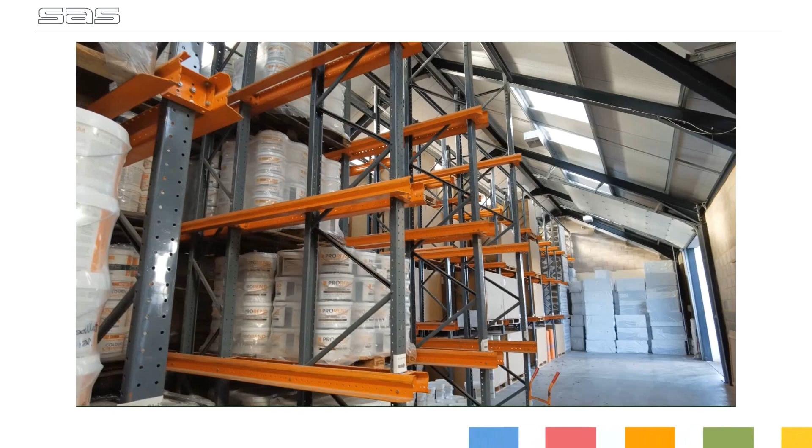SAS Europe Limited is a UK-based manufacturer and supplier of external render systems and accessories. With over 20 years supplying high-quality materials, SAS continues to innovate and create advanced systems and solutions, tailoring the latest materials to match the construction method, specifying solutions that aren't just fit for purpose, but designed for purpose.

Based in the southwest of England, SAS distribute nationwide, offering fast delivery direct to site.

SAS Europe's product range consists of ProBead UPVC render beads, ProRend Color and ProRend ThruColor Monocouche one-coat renders, ProRend Premium base coats and paints, ProRend EIFS external insulation systems, and ProWool rendered rainscreen systems.

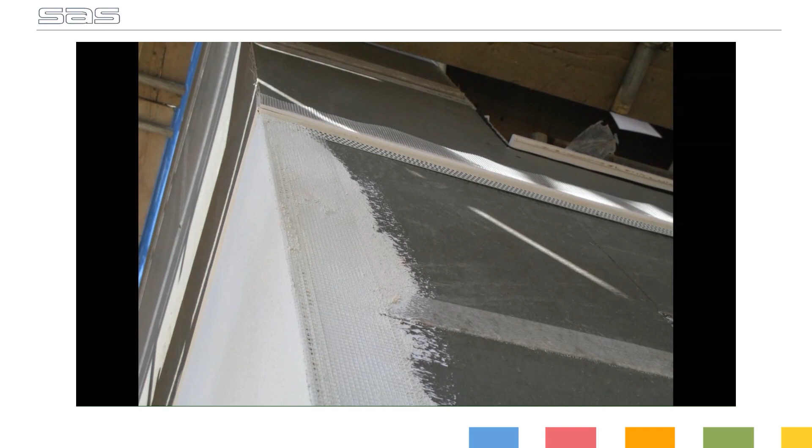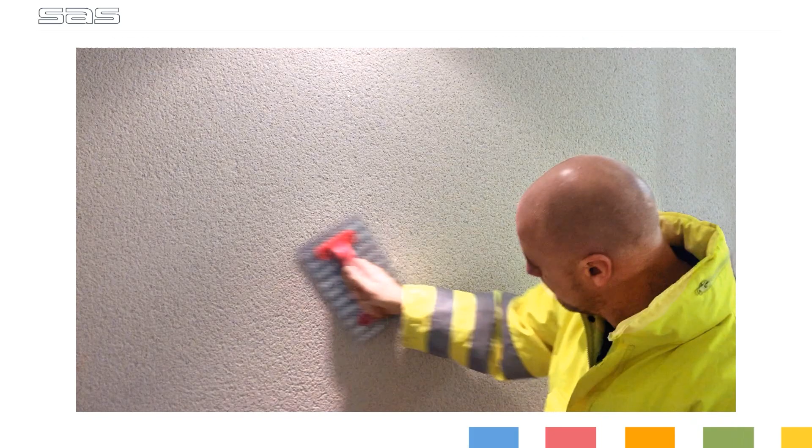There are many different render products and systems available. So firstly, we're going to run through the main types of systems and then have a look at which is most appropriate for each situation.

There's a good reason rendering is such a popular method for cladding a house, from achieving a traditional cottage look to finishing the most modern designs with clean, crisp lines. Render comes in a huge range of finishes and colours.

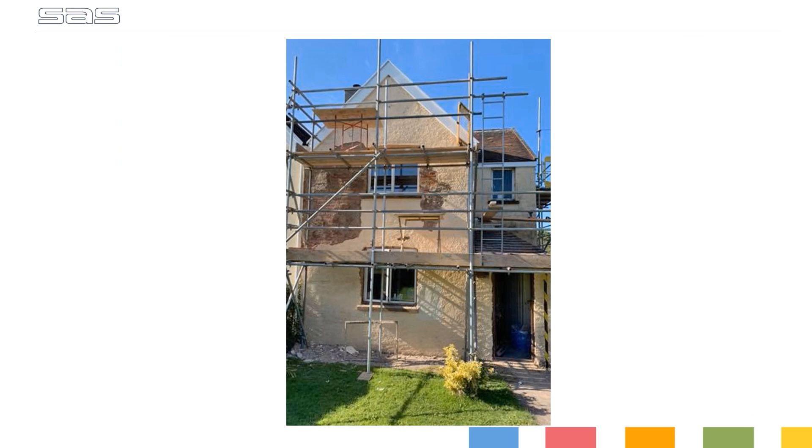Render can be used in conjunction with other forms of cladding to create attractive features and details. There are products and finishes to suit all budgets and everything can be tailored to the construction method. You can use render as part of a renovation to completely transform a dated building into something smart and modern. If you use external wall insulation, you can even transform a building while increasing the insulation value.

When you're looking at render, it's important to consider different types of products and systems to ensure you're making an informed decision when it comes to the right system to suit your needs.

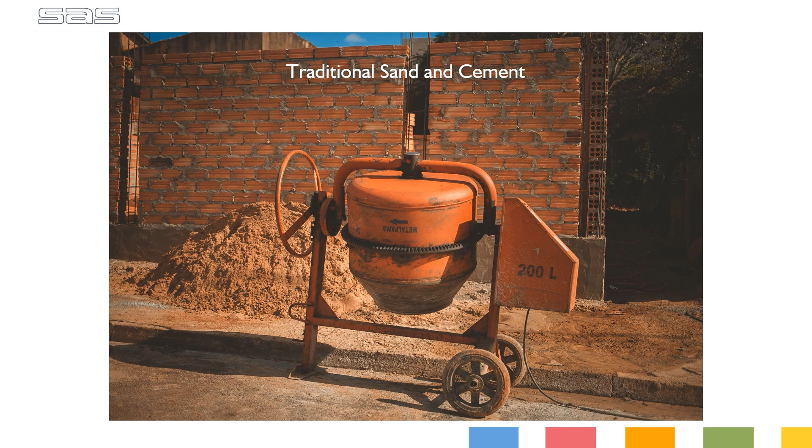If we start by having a look at traditional sand and cement render, we can have a look at the pros and cons. One of the main reasons people like to use sand and cement is because the material is very cheap. Also, because the method has been around for such a long time, a lot of general builders can render in sand and cement.

Traditional sand and cement render is normally made by mixing 4 parts of sand with 1 part cement and is applied to the substrate at a depth of about 15 to 20 millimeters.

It's this on-site mixing that throws up one of the main cons. If you're hand mixing on site, you can't guarantee the consistency in the mix, meaning some areas will be stronger than others. The application is done over the course of 2 to 3 coats, leaving the render to fully cure for a few days between coats. Once finished and fully cured, the render must be painted to finish.

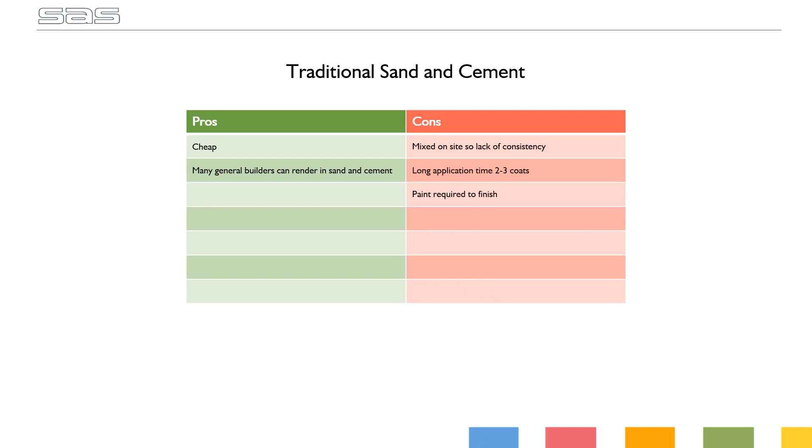While this method has stood the test of time, it's not without its drawbacks. Mixing render on site also means that you've got no manufacturer's warranty, which is one of the main reasons that housing warranty providers prefer pre-mixed products. The cement content and application thickness of sand and cement also means that it's not really suitable for any substrate that could experience movement, as this will likely lead to cracking.

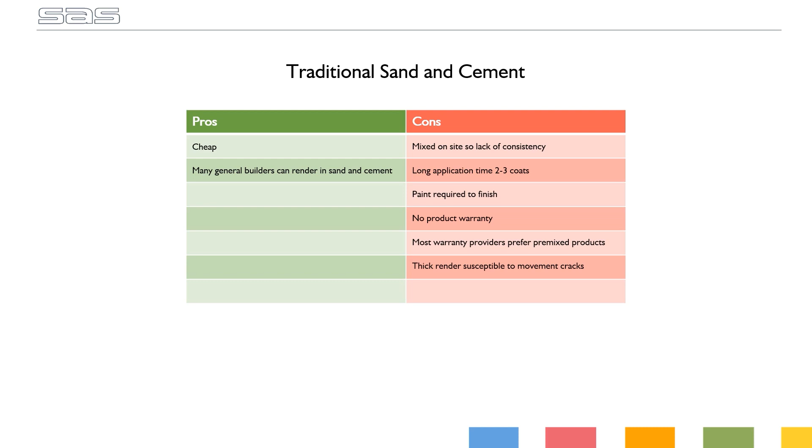So while the material itself is very cheap, due to the number of coats, drying times and paint application, the whole process takes quite a long time, which is obviously paid for in labour and scaffold time.

Let's compare this to an OCR. This is a generic term given to a one-coat render that's pre-mixed and a sand and cement alternative. These often contain polymers and bonding agents as well as additional additives to aid application.

While OCRs are generally more expensive than sand and cement, they're still a relatively low-cost solution. It's also worth noting that while it's a great alternative to sand and cement, it isn't sand and cement, so you should be using a professional with experience in this type of material.

While OCRs still need to be finished and painted like sand and cement, they do come with a number of additional benefits. The pre-bag nature of the product means that you've got complete consistency throughout the mix. This obviously makes the mixing process a lot easier, as everything you need is in the bag. This also means that the manufacturer can carefully balance waterproofer, polymers and any additional additives to create a more capable material that can generally be applied in one coat with a couple of passes, reducing the application time.

Pre-bagged material also has the added benefit of having a manufacturer's warranty. For this reason, it's the option preferred over sand and cement by most warranty providers. The polymers included in the mix can increase the capability of the render and can also create a comparatively lightweight solution. A huge advantage to any commercial project, or anywhere you need a considerable amount of render, is the ability to apply the material by machine, which again decreases the overall labour time.

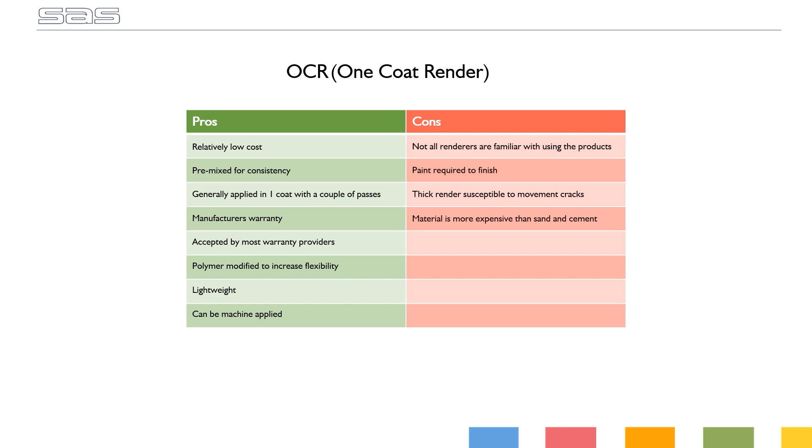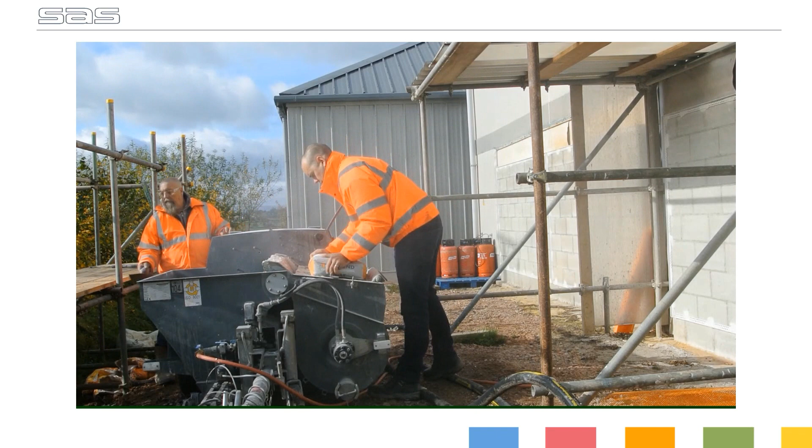At SAS, our OCR solution is ProRend Float. With its ease of hand or machine application and a smooth finish, it's a great alternative to sand and cement, offering all the benefits discussed. We also offer a range of premium paints to complete the application.

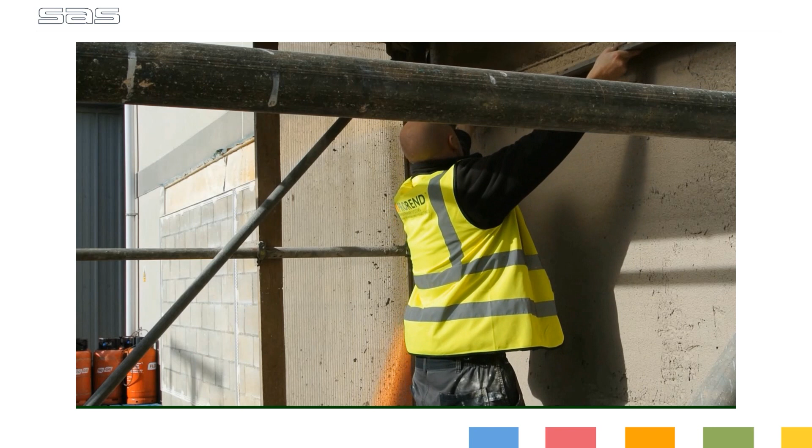Let's have a look at through-colour monocouche render. As we know, on some sites speed is key. It's for this reason that a large portion of major house builders adopted through-colour render systems, often referred to as monocouche render.

With all the benefits that we've discussed when using a pre-bagged system, this also has the added benefit of being pre-coloured, removing the need to paint. Removing the need to paint also results in reduced scaffold time, which can equate to a great saving. Available in a wide variety of colours, monocouche renders offer a great solution for new build block homes. The material should still be applied by a professional, but due to its popularity this has become a common trade.

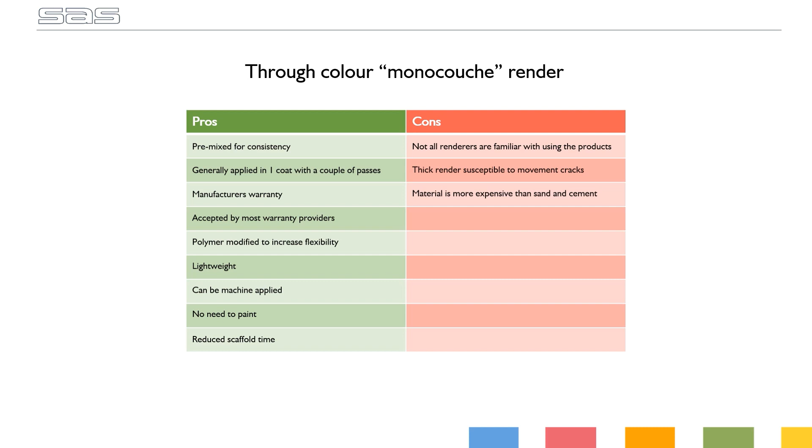At SAS we have two fantastic monocouche renders, with GoRend offering a highly competitive hand or machine applied render, giving you all the advantages that we've discussed, and ProRend Colour, our premium silicon enhanced monocouche render, giving you an additional level of water repellence.

Now let's have a look at how this compares to a thin coat system. Thin coat systems offer a high performing finish suitable for application onto a wide range of substrates. While the application is completely different to a monocouche render, it generally requires 3 coats.

A thin coat system will offer drastically increased crack resistance. The thin application combined with the lack of cement allows a thin coat to absorb a lot of movement before cracking. The added flexibility makes thin coat systems the perfect solution for both EWI and rainscreen systems, as we'll see.

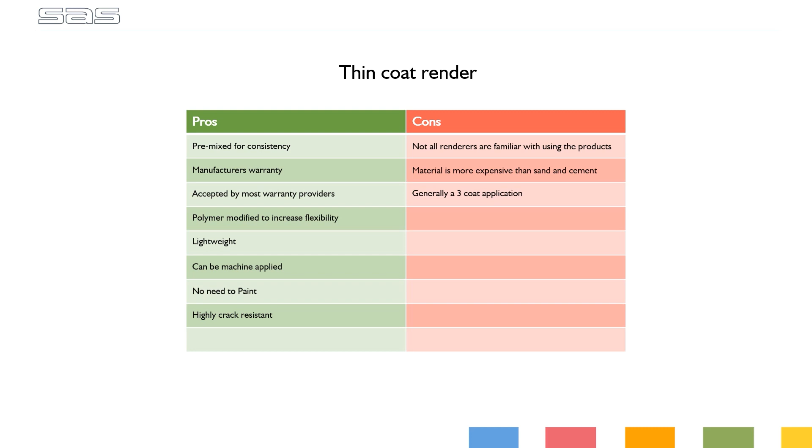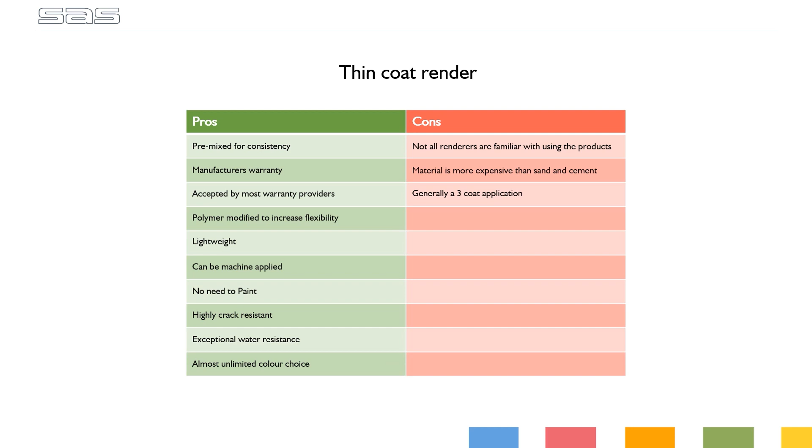Another reason you may be considering a thin coat system is a higher level of water resistance, especially when using a silicon-based top coat to provide additional protection from the elements. Due to the nature of the thin coat render, it's much easier to tint, and as such it's available in an almost unlimited colour choice.

Our thin coat option is ProRend ColorTex, a silicon-based render system available in a 1.5mm uniform finish in over 65,000 colours.

Rainscreen cladding creates a clear cavity from the main superstructure, allowing the building to breathe and giving the highest level of protection from the elements.

Due to the potential for movement in steel and timber frame construction, a thin coat render is the best option for a rendered rainscreen, giving you all of the previously mentioned benefits and the choice of almost any colour, as well as all the advantages associated with a rainscreen, such as the unrivaled protection from the elements.

In terms of installation, the process is a lot more involved, as you're creating a whole new external wall before applying the render system. A rendered rainscreen is a perfect option for a steel or timber frame construction, as it negates the need for an external masonry wall, potentially saving a lot of time and money.

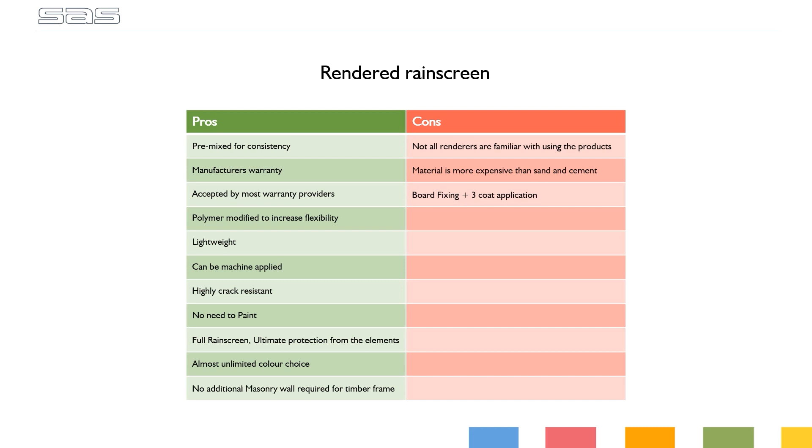Our rendered rainscreen option is ProWall. Using our own cementitious render carrier board and our fully integrated system, we can offer a fully fire rated system with a 30-year BBA.

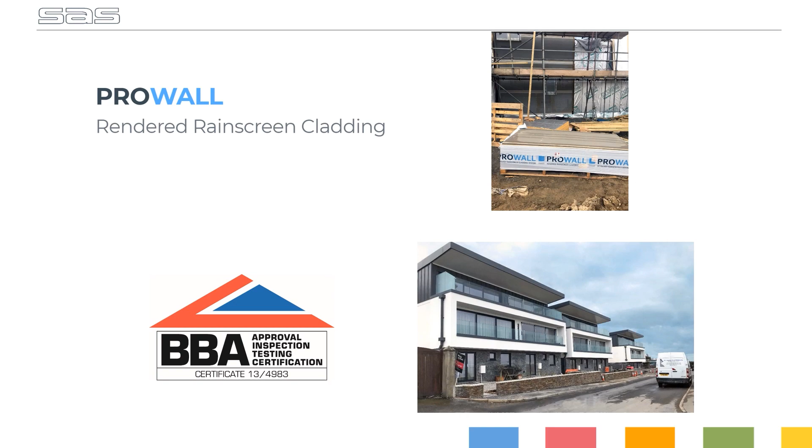Now let's have a look at external wall insulation. External insulation systems are generally finished with thin coat render systems, giving you all the benefits that we previously discussed, while increasing the insulation value.

This system is generally used for renovation and can be an ideal solution to bridging multiple substrates and solving damp issues. It provides excellent protection from the elements.

As in the installation of the rainscreen system, this is a lot more involved, requiring the installation and fixing of the insulation prior to the render application, so this should always be installed by a specialist.

This system can also be used on new builds to increase the insulation values when there's not enough room for adequate insulation within the wall structure.

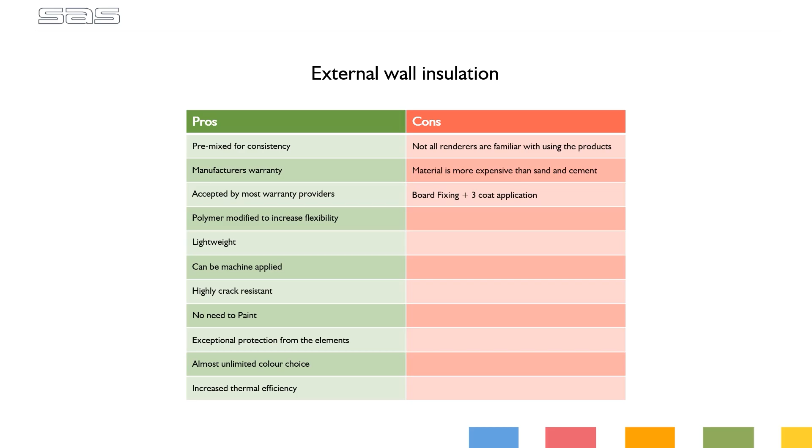Our external insulation option is ProRend EIFS. With an option for EPS or mineral wool, we're able to achieve a 30-year BBA.

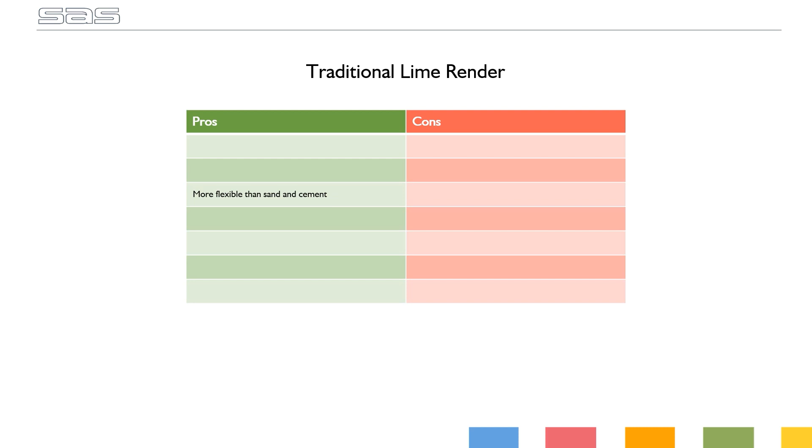Something we should also cover is traditional lime render. Lime render uses natural hydraulic lime and sand to create a cement-free render mix. This traditional method is very breathable and flexible, enough to accommodate minor movement without cracking. For this reason, lime render is the preferred solution for most cob walls or historic restoration.

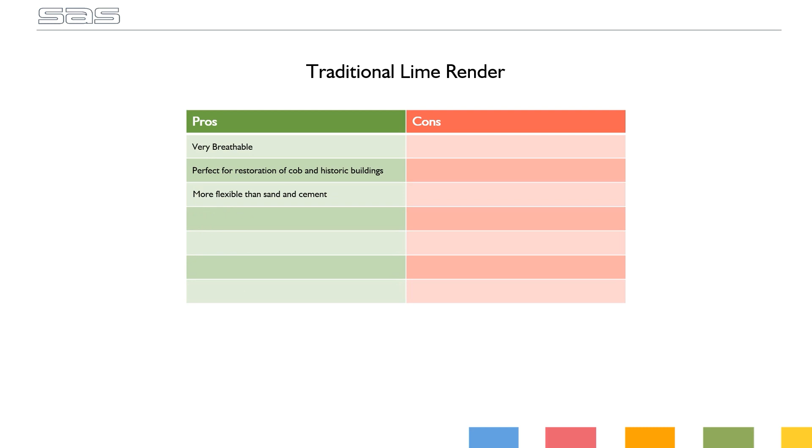While the properties of lime render are perfect for this type of work, it's not without issues. Lime is a specialist product and will need to be installed by a specialist applicator. Lime renders are often finished with a lime wash, although some specialist mineral paints can be used to achieve desired colours.

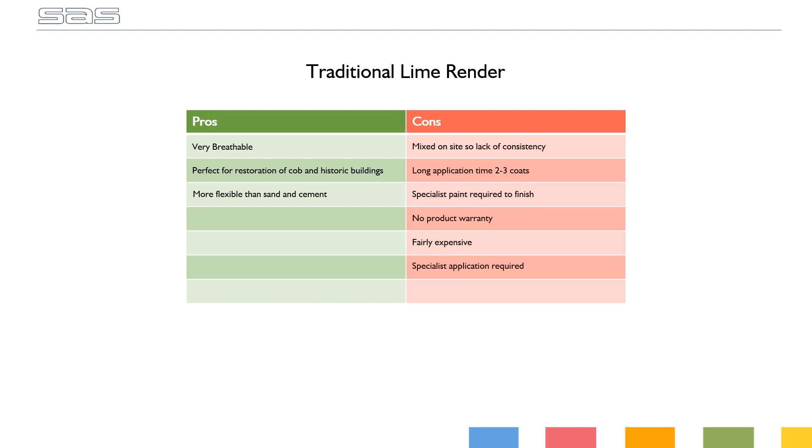The combination of specialist materials and application makes the whole process quite expensive. As with traditional sand and cement, an on-site mix can create a lack of consistency with no underlying manufacturer's warranty. Some of these issues can be removed by having a look at a pre-bagged solution instead.

As with site-mixed lime render, you retain the breathability and the flexibility of lime render, but with the added benefit of a consistent mix, which will reduce your mixing time as well as add a manufacturer's warranty. Lime render is generally used in restoration or very specific instances requiring a high level of breathability. When breathability is less of an issue, other cement-based options offer a much higher level of water resistance at a much lower cost.

Now that we have an overview of the different systems available, let's have a look at this from the other side. Based on your building type and your requirements, what type of system should you be looking at? Let's start with new build blockwork. Based on a standard cavity wall, the insulation requirements should be met within the construction, and the external skin should be a dense concrete block, giving you the perfect substrate for render.

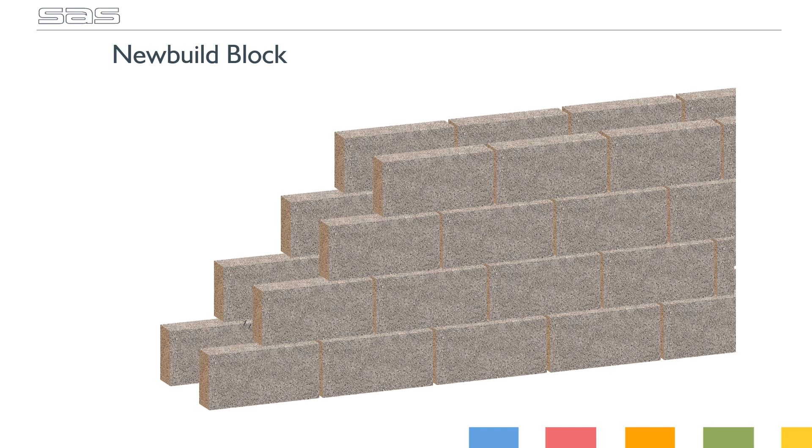You have 4 main options open to you: traditional sand and cement render, OCR one-coat render, monocouche through-colour render, or a thin-coat system.

Depending on the exposure of the site, water resistance may be the deciding factor. British Standards divides the UK into 4 exposure zones. Monocouche, OCR and sand and cement are typically well suited to projects up to and including severe, but tend to require a thicker application or overcoated with a water repellent finish for any very severe locations.

Thin coat render typically offers a higher level of water resistance and is well suited to all exposure zones, especially if the top coat is silicone based. It's also worth mentioning at this point that most render products can be applied at temperatures between 5 and 30 degrees centigrade unless they've been specifically formulated for low temperatures. So it's worth bearing this in mind when compiling the build schedule.

Exposure zones will affect the maintenance schedule for any render system. For that reason, ongoing maintenance should be a big factor when deciding if you're going to use a coloured system or one that requires painting.

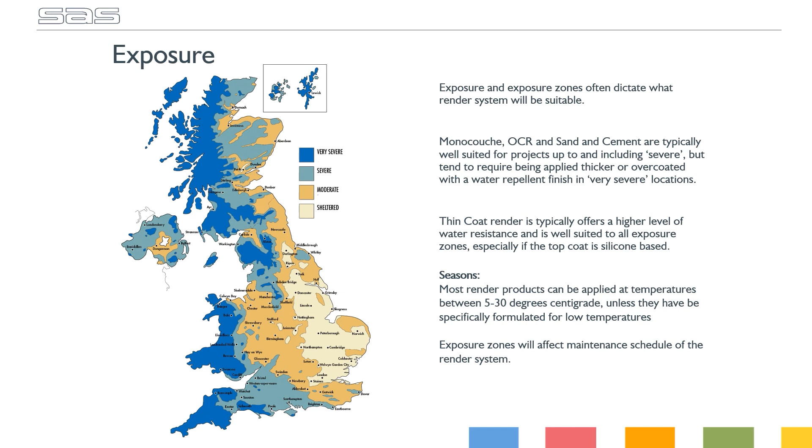If we have a look at the application of our ProRend float as an OCR, this is mixed up with clean water with a drill and whisk.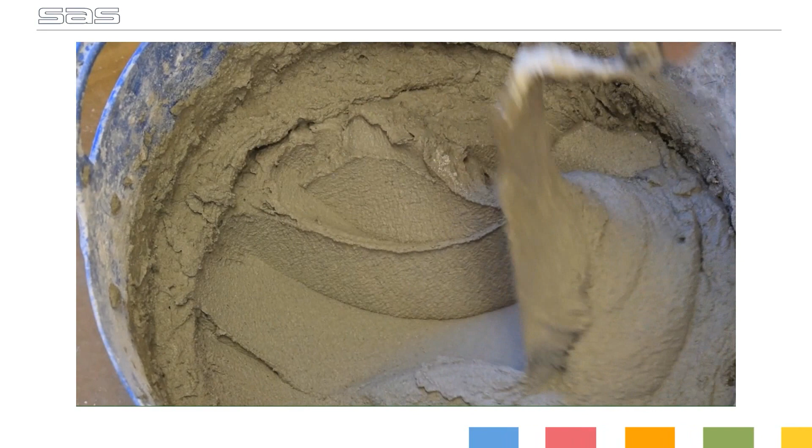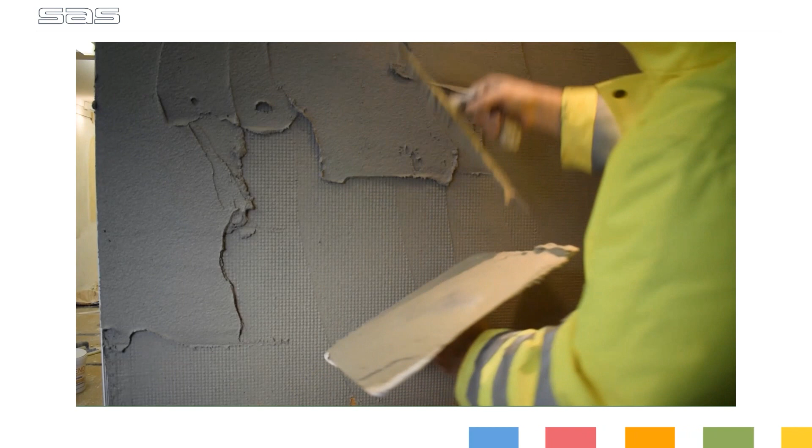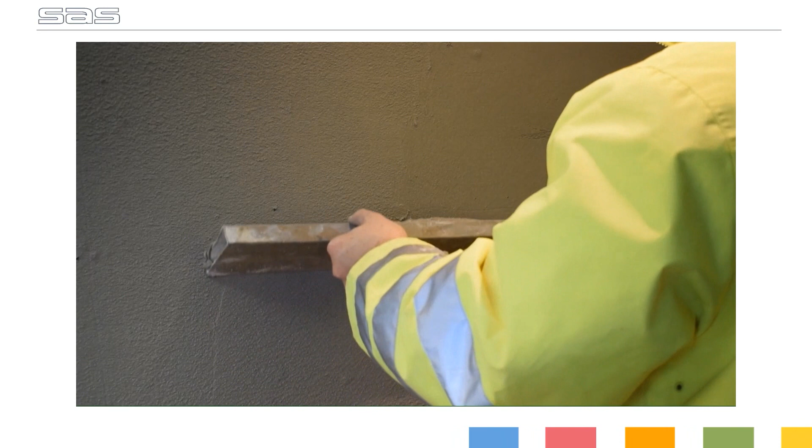The first pass of 7 to 8mm is applied and fully embedded with ProMesh Grade 5. This is followed with a second pass bringing the total thickness up to 15mm. The material is then levelled. You can leave this with a sponge finish to be painted.

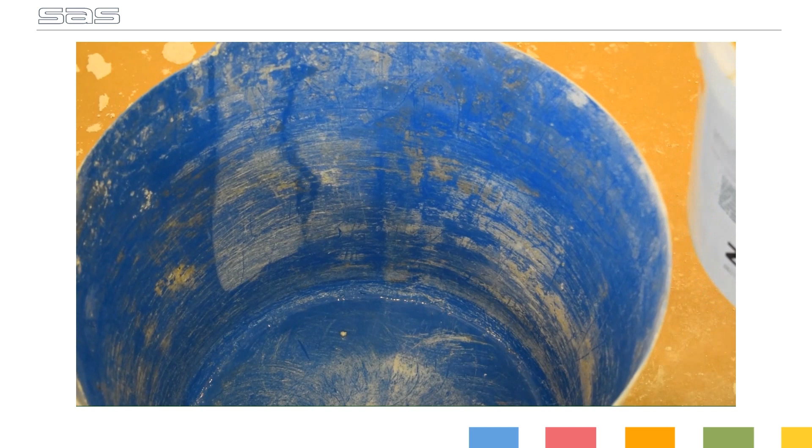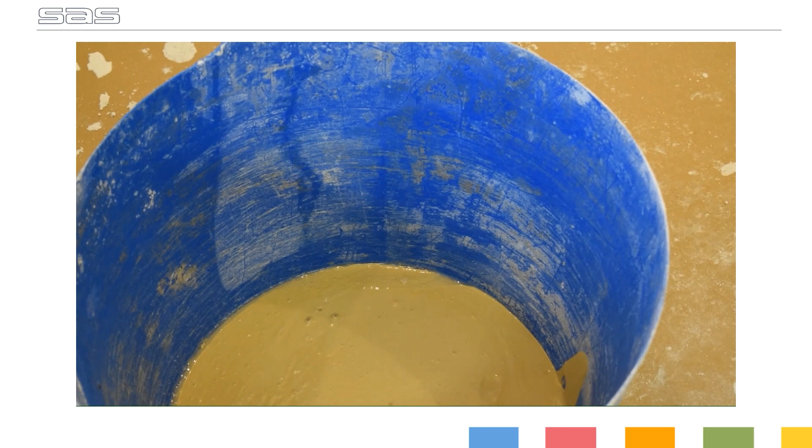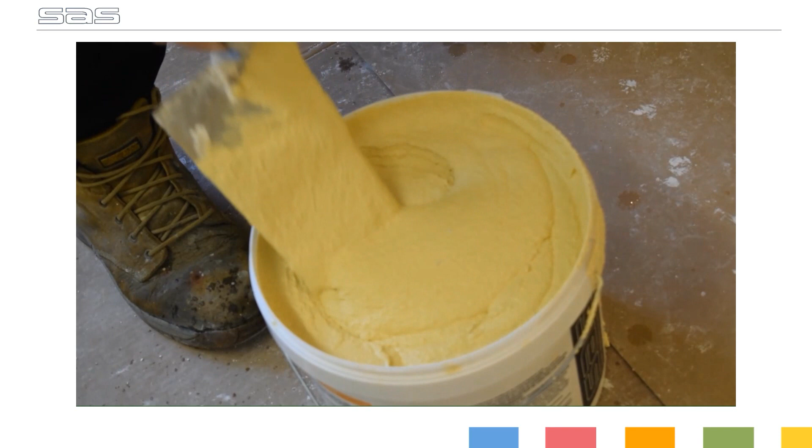Alternatively, at this point, a colour primer could be added. The primer can be applied using a brush or roller. This is followed by our colour textfino system. This creates a much more water repellent, low maintenance finish. The colour text is finished with a plastic float, giving you an attractive uniform finish.

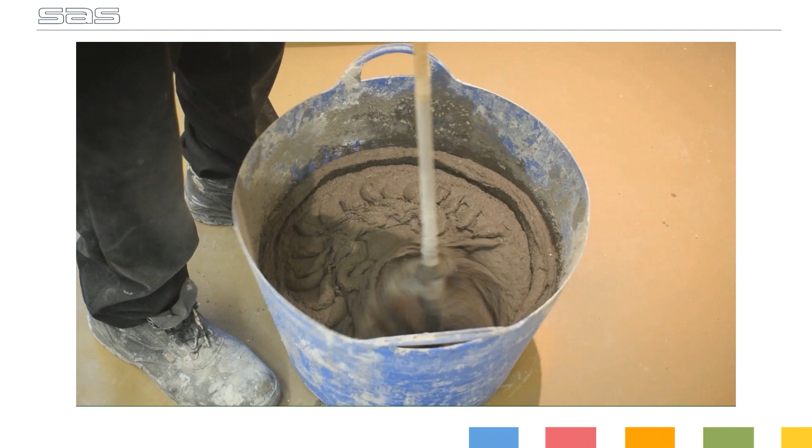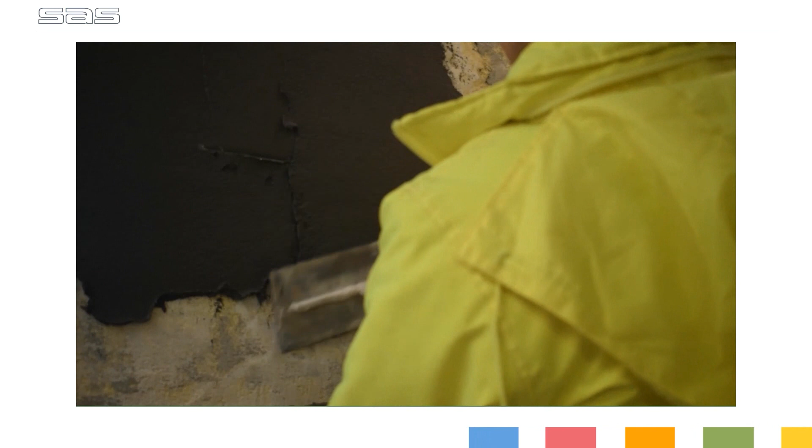The monocouche application couldn't be simpler, as you only need to use a single product. GoRend is applied directly to the blockwork at 7 to 8mm. Fully embed the Go Mesh fibreglass reinforcement mesh.

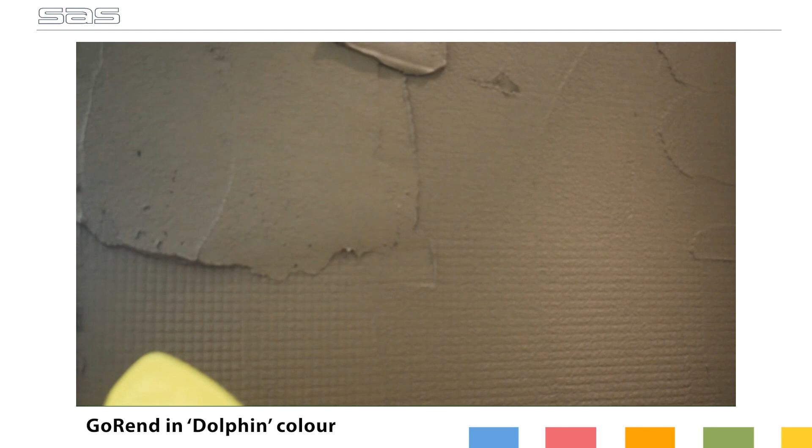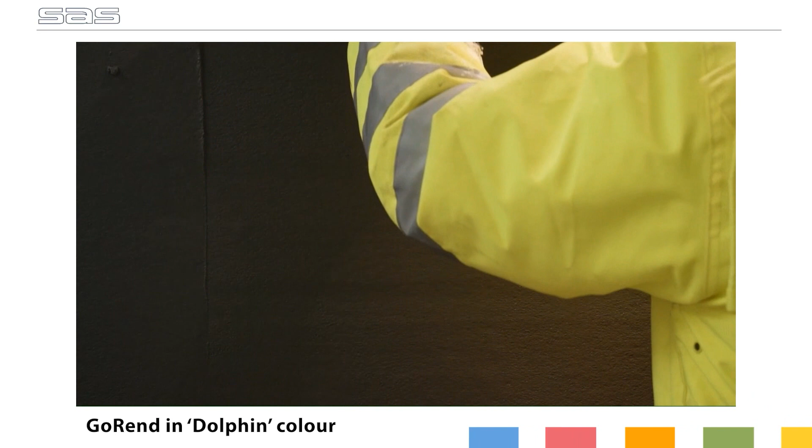The second pass brings the render to about 17mm. This is levelled off and then left to cure. The next day this is scratched back to 15mm, giving you an attractive finish without the need to paint in a very short amount of time.

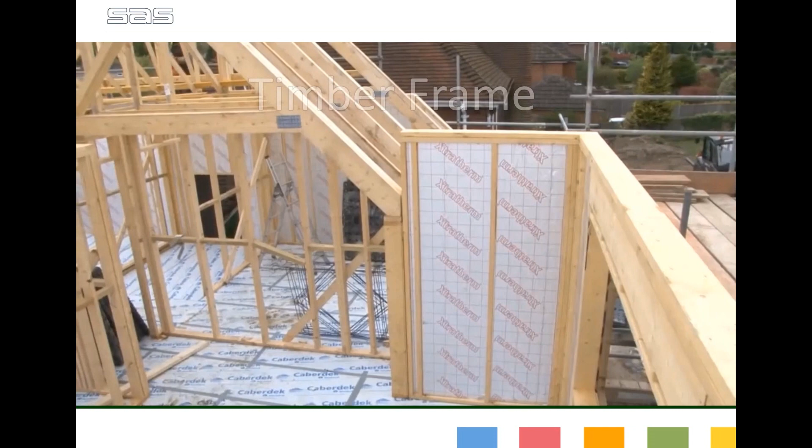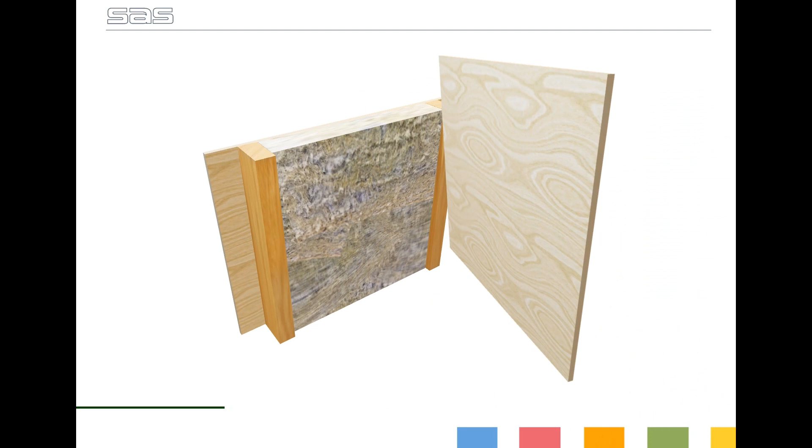So what about timber frame? If you're considering a new timber frame building that will require render, you've got a couple of options. You can build an external skin of blockwork or brickwork to receive a rendered finish. A cavity is created and the new wall is tied back to the frame.

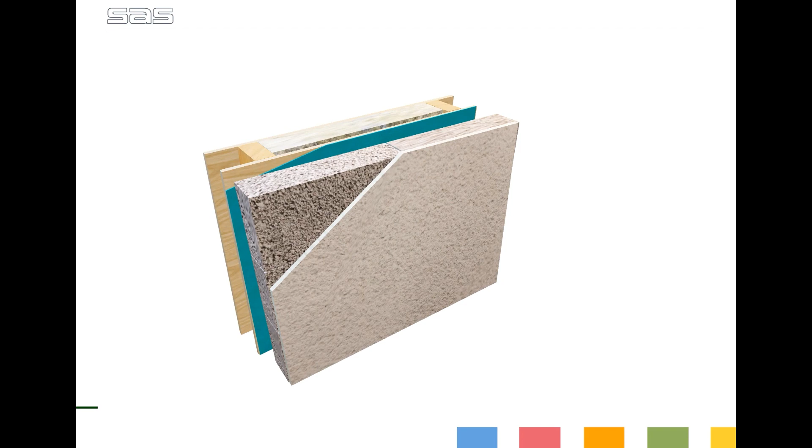You can now render the blockwork using any of the methods that we've discussed. While this works well, it does mean that you're adding a masonry build to the process, which comes with its own lengthy timescales and can be affected by the weather.

The second option is to fit a rendered rainscreen. This will dramatically reduce the build time as well as reducing the thickness of the foundations, as you don't need to accommodate a masonry wall. As we previously discussed, this gives you exceptional protection from the elements with a very low risk of cracking, and the option of almost any colour.

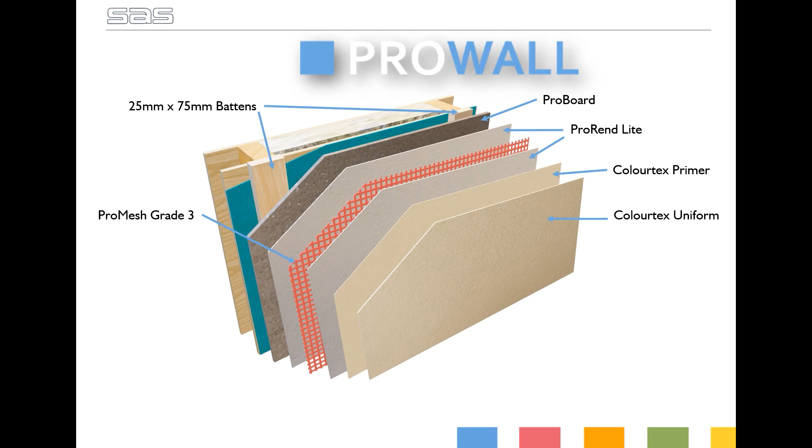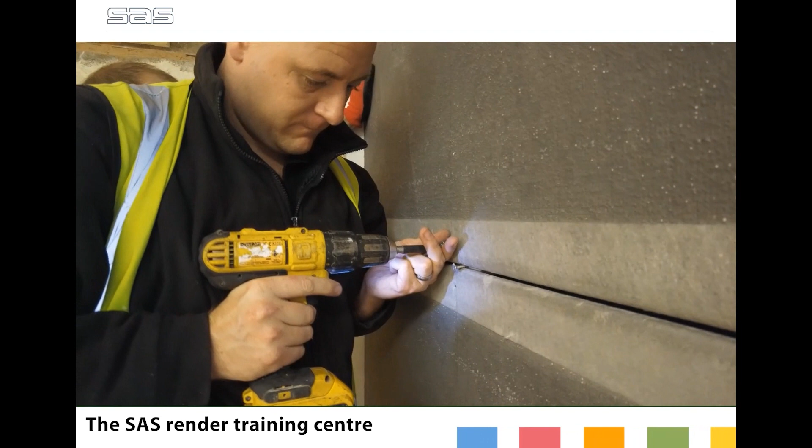If we have a look at our ProWall installation video filmed in our training centre, you can see how this would be applied. Firstly, a fully ventilated cavity is created using 25 by 75mm battens. The ProBoard render carrier board is fixed using stainless steel screws.

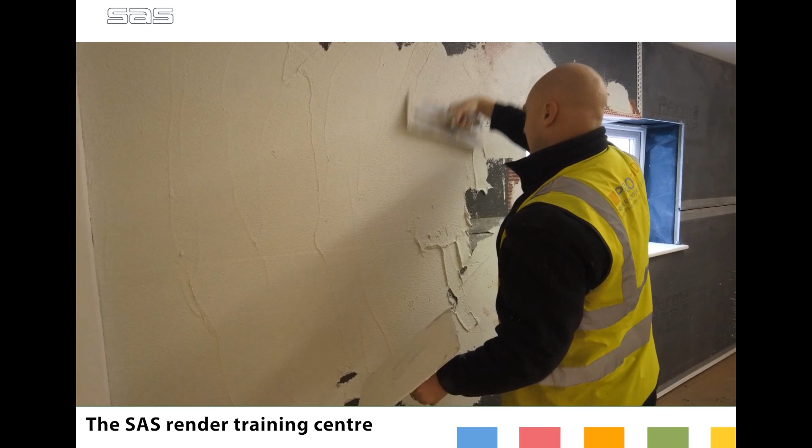ProRend Lite is a highly polymer modified base coat formulated to give incredible adhesion and allow an element of flexibility, perfectly suited to timber frame application.

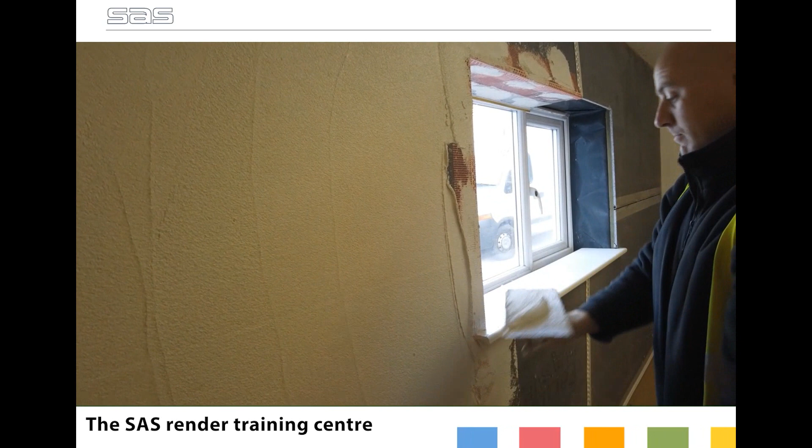The ProMesh Grade 3 is fully embedded into the base coat, reinforcing the entire area and providing an additional layer of crack resistance.

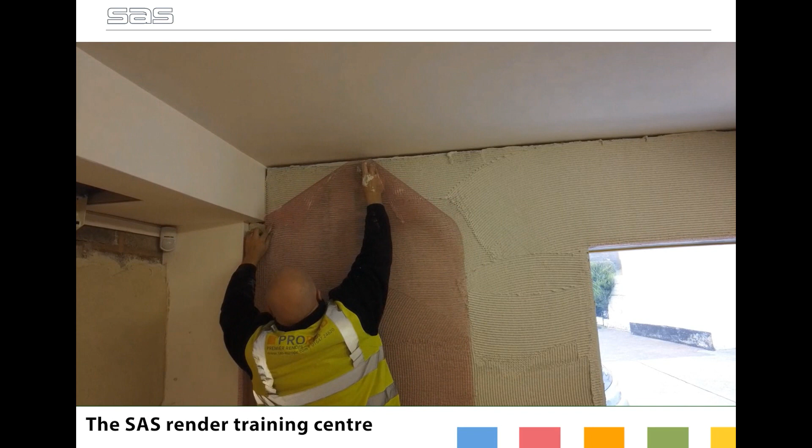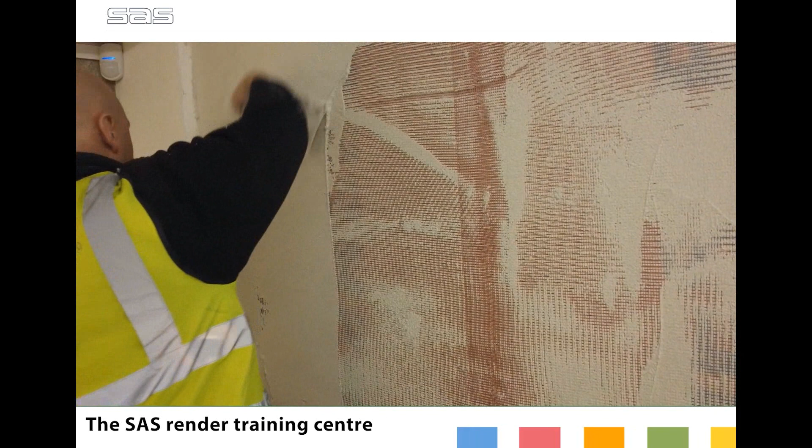The Colourtex Primer is applied to the base coat, pre-colouring the surface to ensure excellent colour coverage.

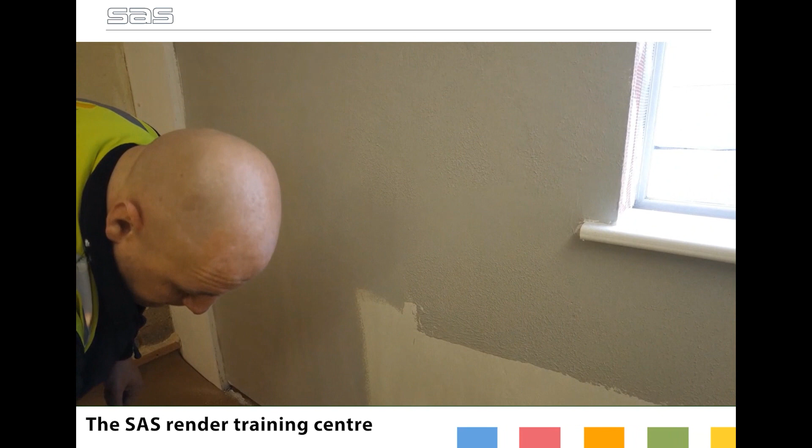The final application of ProRend Colourtex Silicone Top Coat provides an attractive finish that is available in a wide variety of colours. It's supplied in a pre-mixed bucket to ensure colour consistency.

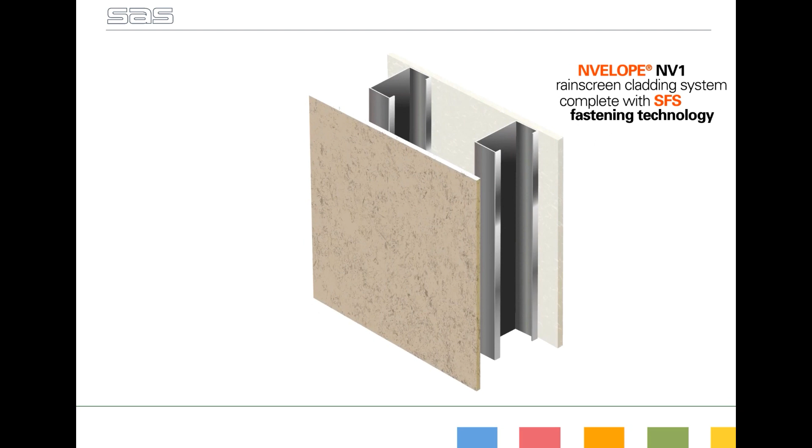Steel frame buildings are treated very similarly to timber frame when it comes to your render options. Again, you could build a masonry wall to open up almost every render as an option, or you can use a rendered rainscreen. This is achieved in almost the same way as you would with timber frame, but by using

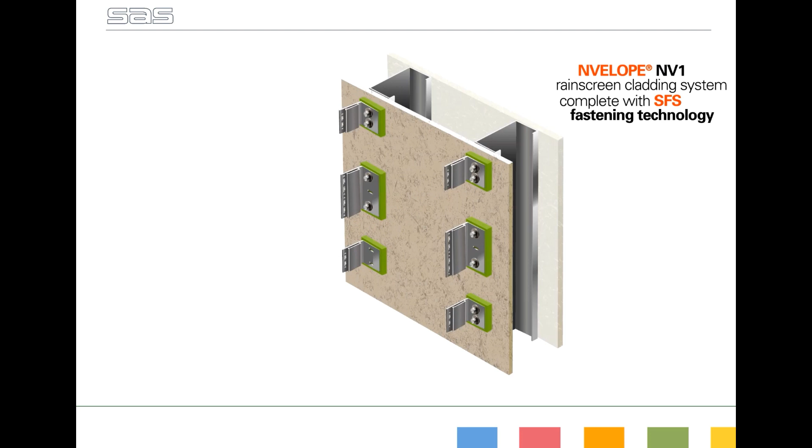a helping hand bracket system rather than battens. This allows you to fix any additional insulation back to the sheathing. This is also a great solution for high-rise steel frames, where masonry just isn't an option.

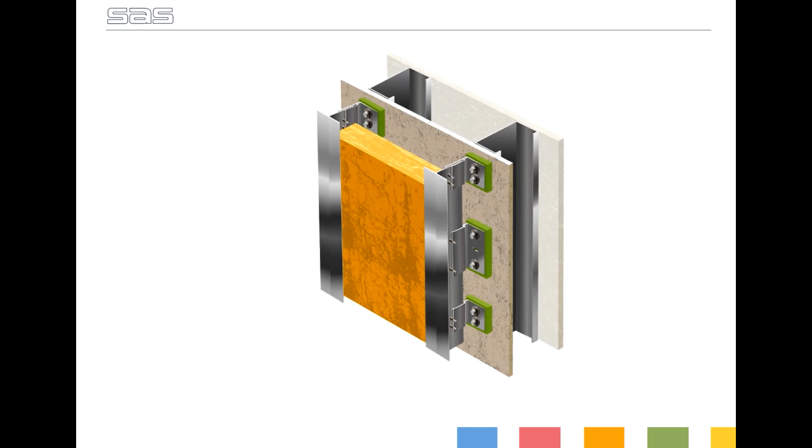With the latest fire regulations for cladding over 18 metres, many types of cladding are no longer acceptable. Fortunately, our ProWall rendered rainscreen meets the required standard of A2 S1 D0, making it a perfect option for many high-rise buildings.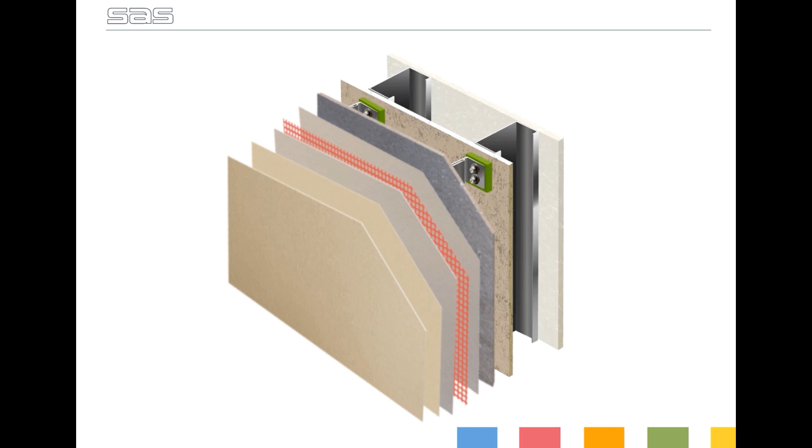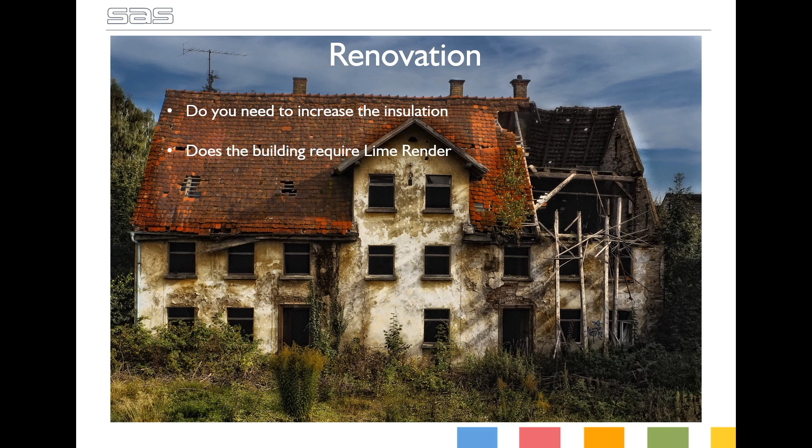A renovation holds the widest range of possible substrates and requirements, and as such it's a good idea to discuss the project with your preferred render supplier. But one key point to ascertain is whether you're looking to increase the insulation value of the building and also if the building requires lime render.

A popular option for renovation is using an external insulation system to give a complete new facade to most existing buildings with the added benefits of increasing the insulation value.

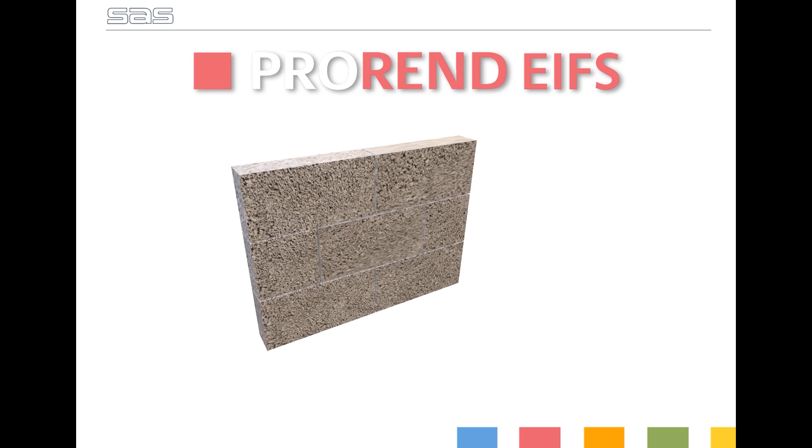The insulation system can be either EPS, expanded polystyrene, or mineral wool, with the EPS offering a better insulation value and the mineral wool offering a higher level of fire retardance. Whatever the requirements, there's always a solution to fit your project.

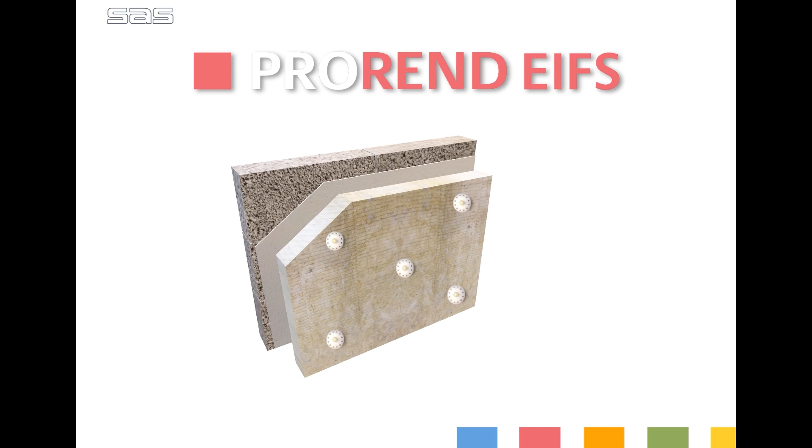The insulation is first stuck to the substrate using ProRend Light adhesive. The boards are then mechanically fixed to the substrate using the appropriate fixings, locking them in place. The same ProRend Light material is used for the base coat and fully embedded with ProMesh Grade 3.

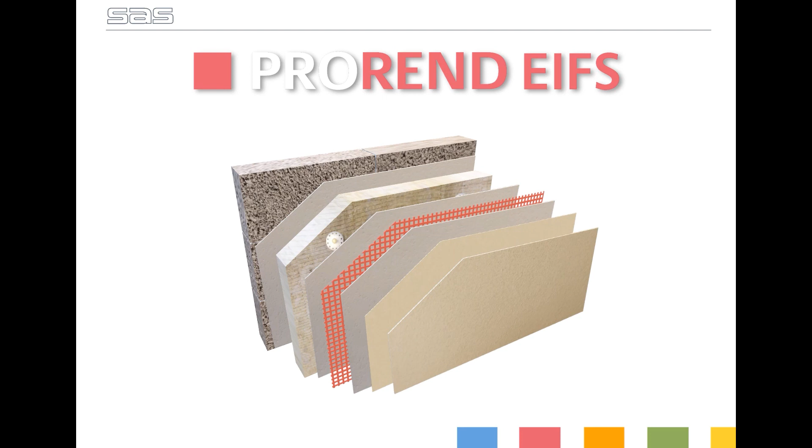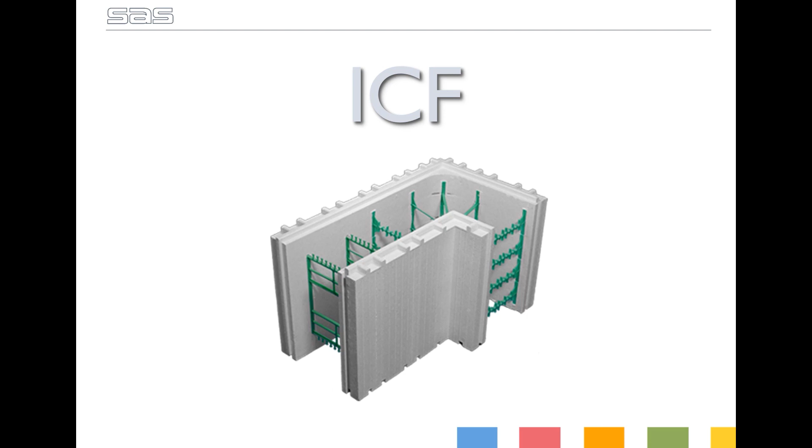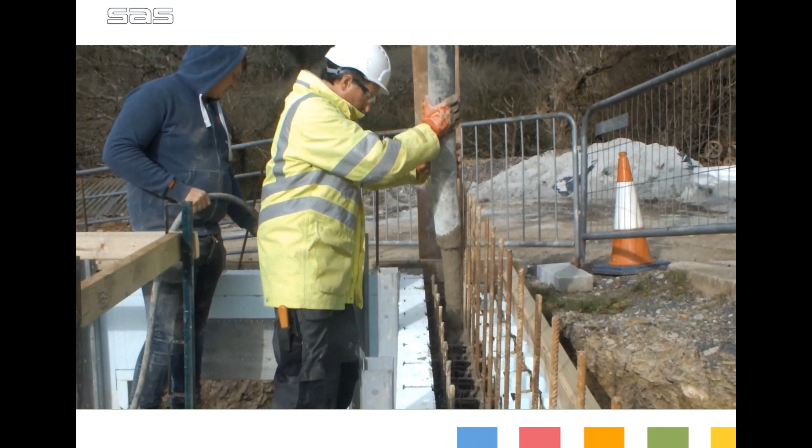ICF, or insulated concrete formwork, is very much its own category, an innovative building solution to offer short build times and incredible insulation values. An ICF system consists of prefabricated hollow polystyrene blocks that interlock to form a structure. These are then reinforced and concrete is poured into the hollow.

This system provides fantastic U values, ranging from around 0.3 right down to 0.11. The ICF structure also provides fantastic airtightness, and the concrete and the insulation combine to create a sealed shell, reducing heat loss.

When it comes to your render options, this should be finished in the same way as your external insulation system, so most manufacturers will suggest a thin coat system. As you're applying the render to a soft substrate, the flexibility offered by a thin coat system suits the application very well and allows you a fantastic freedom when it comes to colour choice.

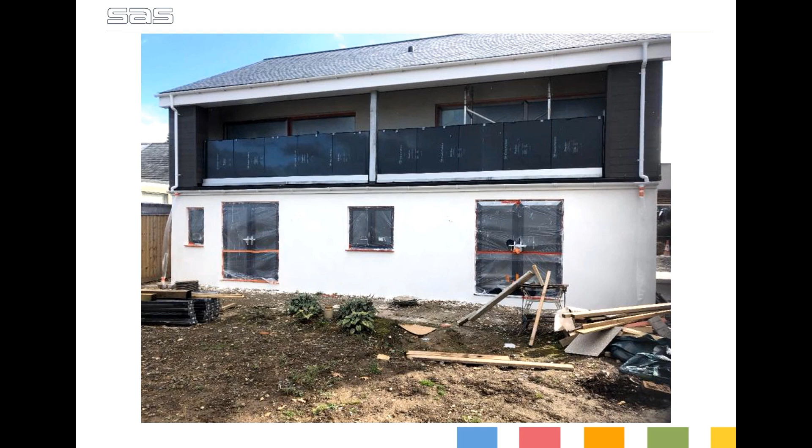So in summary, there's no one product to suit all requirements. There's some great products on the market that provide key advantages when used in the right situation. Consider all factors. The method of construction is obviously key, but as we discussed, location, exposure, and ongoing maintenance are

also key considerations. To make sure you get the most out of your project, it's always a good idea to talk to the manufacturer who can guide you to the best solution. All of these considerations will lead you to choosing the right system for the job.

At SAS Europe, our technical team is on hand to work with you through every stage of the development. Whatever the form of construction, we can offer guidance, specifications, samples and support to ensure your project looks fantastic and stays that way.